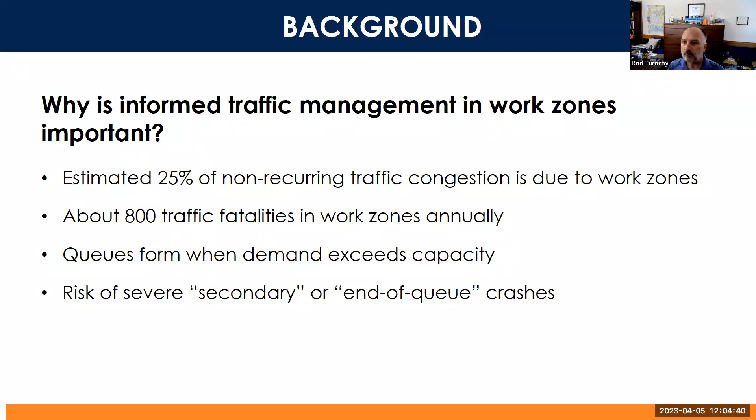The portion of the research work done at Auburn, I've entitled Capacity of Freeway Lane Closures, looking at breakdown probability and heavy truck impacts. I need to acknowledge a couple of graduate students, Nick Jean and Han Lo, who also worked on this research project. I've been interested in work zone traffic management pretty much as long as I can remember, going back almost 30 years ago to when I was an engineer trainee and then a traffic engineer with the Virginia DOT, where work zone safety was my area. So this is an area that's been of importance to me for a long time.

So the purpose and scope of the portion of the research project conducted at Auburn was, again, trying to support an informed approach to scheduling lane closures on freeways.

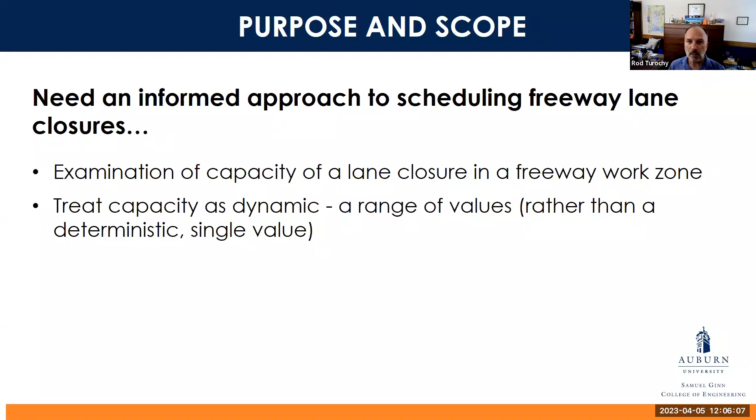We looked at the capacity of lane closures in a freeway work zone, and treated capacity as dynamic rather than a single static deterministic value. That's an important premise guiding the work, because while tools exist, for example in the Highway Capacity Manual, that allow estimation of the capacity of a work zone, it's still a single deterministic value rather than having some range or variance or spread that accounts for the actual randomness in traffic conditions. So in this research, we tried to account for that.

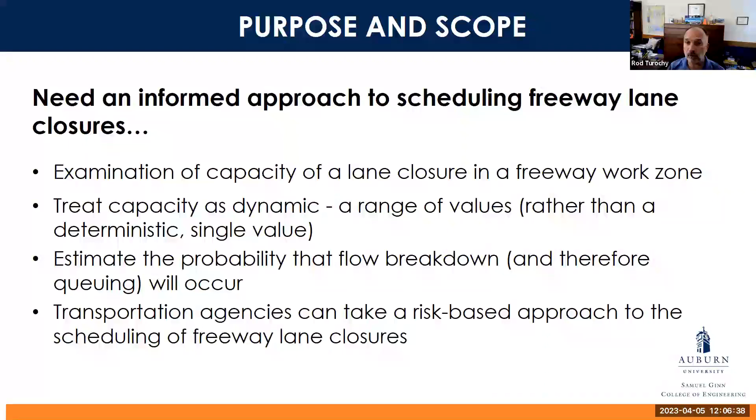We were interested in estimating the probability, or the percent chance, that a breakdown in traffic flow, and therefore a backup or queuing and all the mobility and safety impacts of that, will occur. This approach allows transportation agencies to take a risk-based approach to scheduling freeway lane closures. In other words, what's the tolerance of risk that a backup will occur at a lane closure? We'll get into that over the next few minutes.

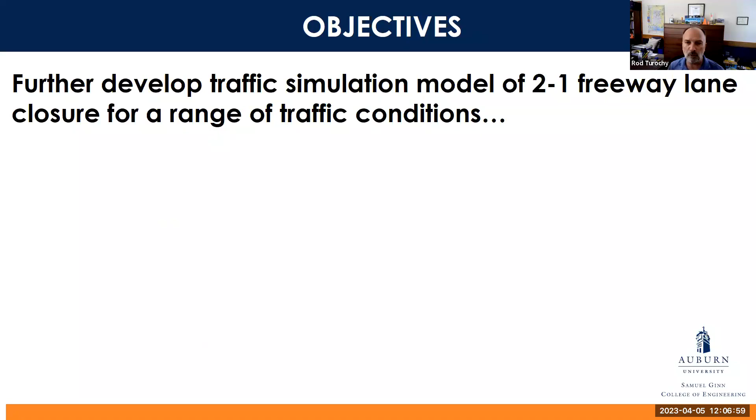So the objectives of the portion of the research done at Auburn were to further develop traffic simulation models for a classic 2-lane to 1-lane freeway lane closure on one side of a 4-lane freeway or interstate highway, across a range of traffic conditions.

It was built on the traffic simulation models in the package VISSIM that were developed and calibrated for a previous STRIDE research project entitled Project J, which this project expands on. We'll quickly go through the findings of that project and then get on to the new findings we have to report today.

If you would like more detail on that STRIDE Project J, just Google STRIDE Project J, and the project page will come up along with links to the final report and the recorded webinar.

In this research, we built upon a pilot approach, or test case, that was the conclusion of that previous STRIDE project, expanding the range of traffic conditions in terms of volumes, truck percentages, and so forth, addressing the previous work. We'll look into that over the next few minutes.

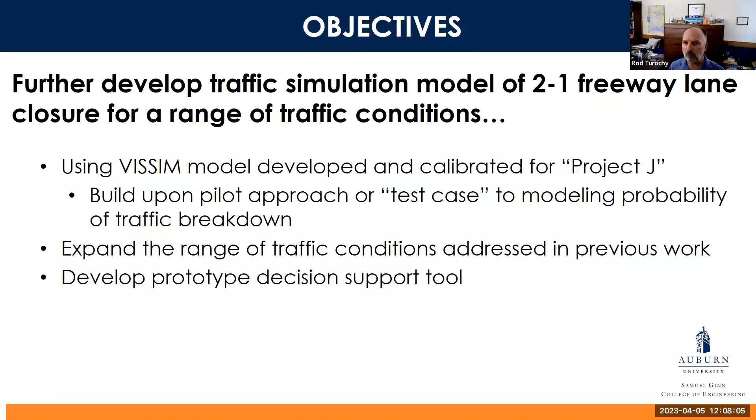And this culminated in the development of a prototype decision support tool that transportation agency decision makers can use to make a more informed decision as to when to allow a lane closure to occur.

Along the way, because we were looking at capacity in a live traffic stream with field data that had a fair amount of heavy trucks in it, we were also able to develop some passenger car equivalencies for those heavy trucks and compare those with what's in the Highway Capacity Manual.

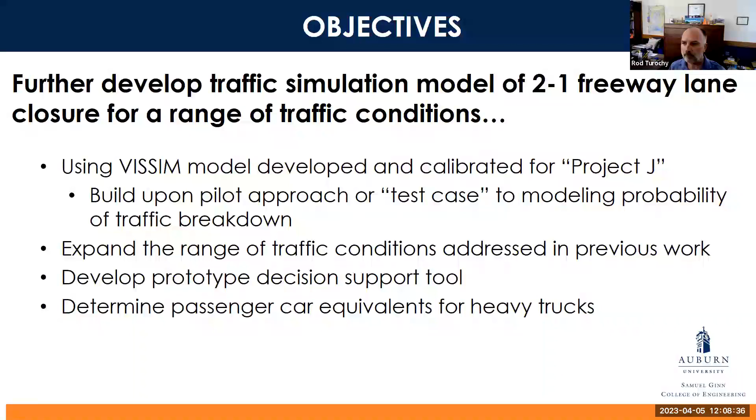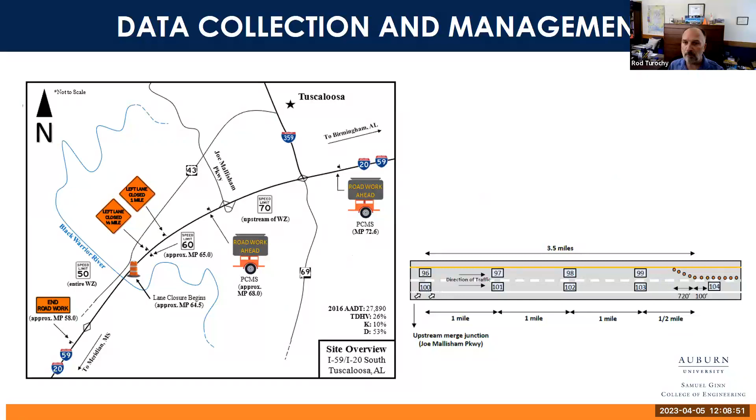So first, let's spend a moment taking a look at the site where we collected the field data. This is a section of I-59 and I-20 overlap just southwest of Tuscaloosa, Alabama, where the data were collected for that previous STRIDE project, where the models were developed and calibrated, and then expanded in the current work.

It was a classic 2-to-1 lane closure on a rural freeway, 4 lanes, 2 lanes in each direction, in level terrain. That's important to note, because the findings we'll get into in a few minutes carry that caveat with it, that it was for a rural freeway 2-to-1 lane closure in level terrain.

So for 2 weeks that work zone was in place, several days with a left lane closure, and then several days with a right lane closure at that same location.

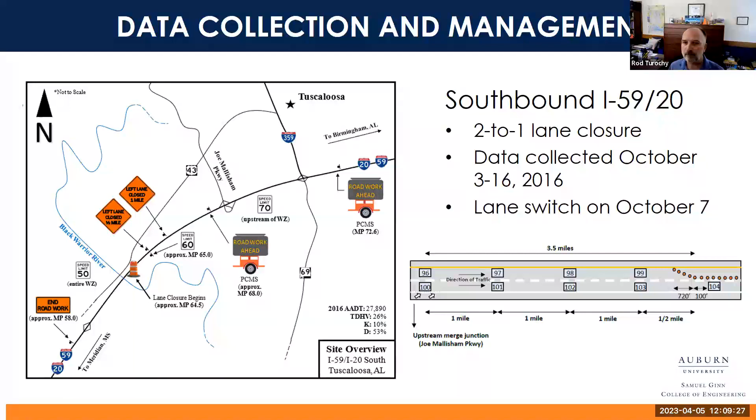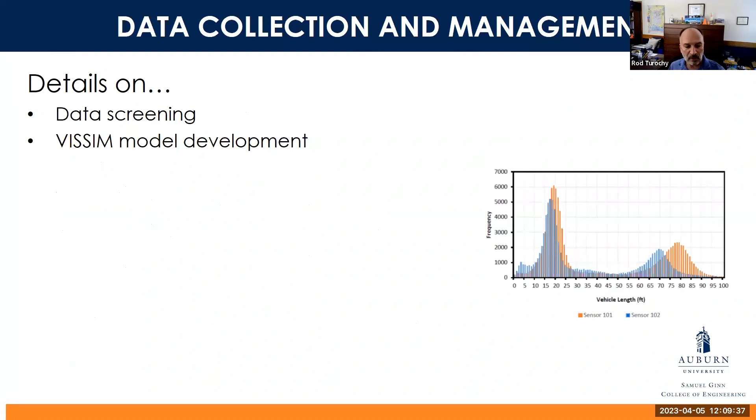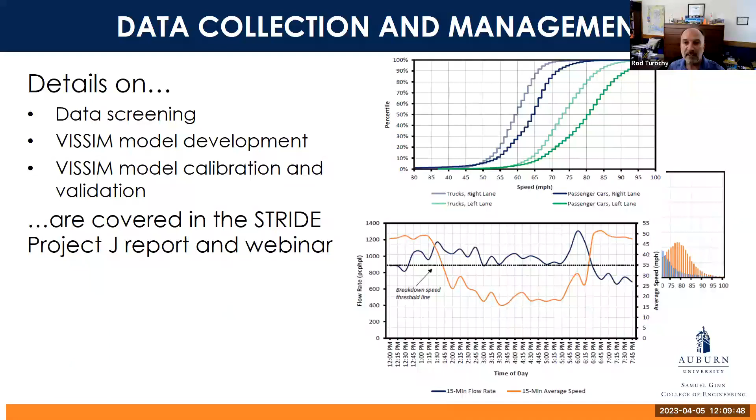Details on the screening or quality control of the field collected traffic data, the development of the VISSIM traffic simulation model, and the subsequent calibration and validation processes for that model can all be found in the STRIDE Project J report and webinar. So we'll just hit the highlights here.

One of the interesting things we find is we started looking at conditions where traffic demand was such that we were reaching capacity for that lane closure. We had to define at what point in traffic conditions we considered there to be a breakdown. A criterion had to be decided upon.

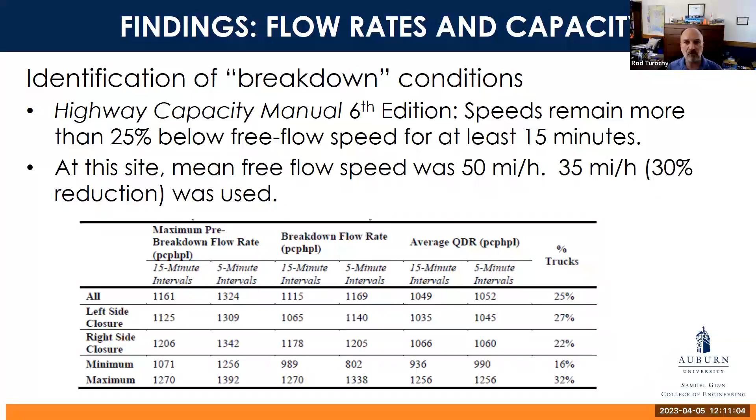We had the data in the field from this rural freeway lane closure and level terrain to come up with all these values, and those were the basis for the VISSIM model. We'll get more into that in a moment.

Some findings from that previous project, just to hit highlights for those in the audience who do traffic simulation modeling of work zones: we had to change several parameters from the default values that were in VISSIM.

For example, VISSIM uses 8 feet per second squared as the heavy truck acceleration, but that's more appropriate for trucks in Europe, which is where PTV Group, the makers of VISSIM, are based. So we had to calibrate that to 2 feet per second squared for the larger, heavier trucks we have in the US. We also needed to modify the default time gap, or time headway distribution, in VISSIM.

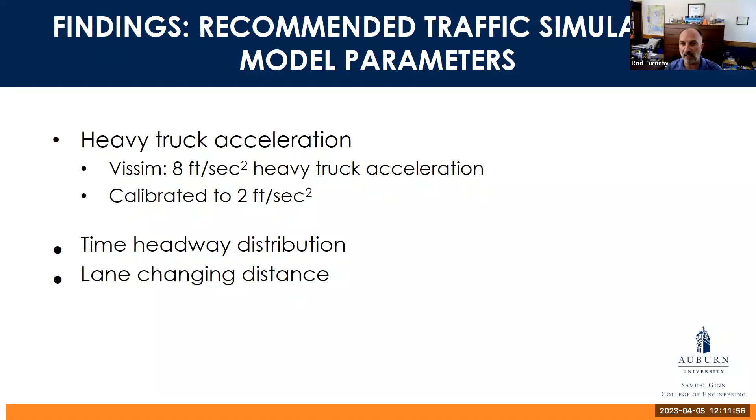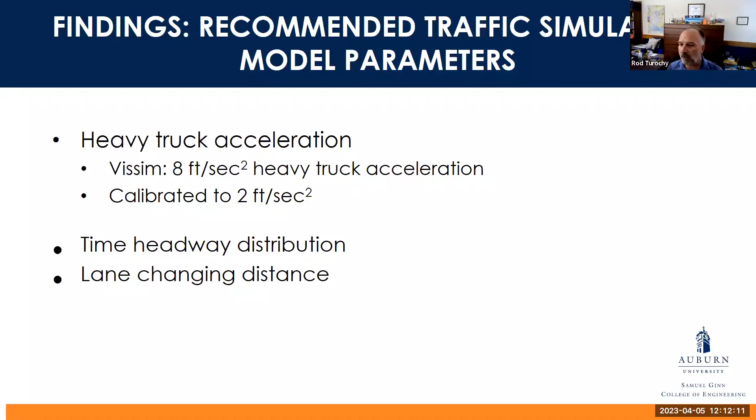We also modified the lane changing distance, and found that traffic at our site in the rural southeastern US merges into the lane that's about to be closed further in advance of the actual taper than the default values in VISSIM. Details on all of that work can be found on the STRIDE Project J webpage and resources.

Moving on to the work done as part of this current project, it's worth noting as background that the models for freeway lane closures took a major step forward in the 6th edition of the Highway Capacity Manual, released in 2016. They're more sophisticated and based on much deeper data sets than prior editions of the HCM, yet they're still deterministic.

For a given set of traffic and geometric conditions, the equations spit out a single value for capacity in that situation. Yet in recent years, some research has suggested that capacity is not actually a fixed value, but has a bit of a spread or range to it. There's some randomness we wanted to account for, so we viewed it as a stochastic process rather than a deterministic one.

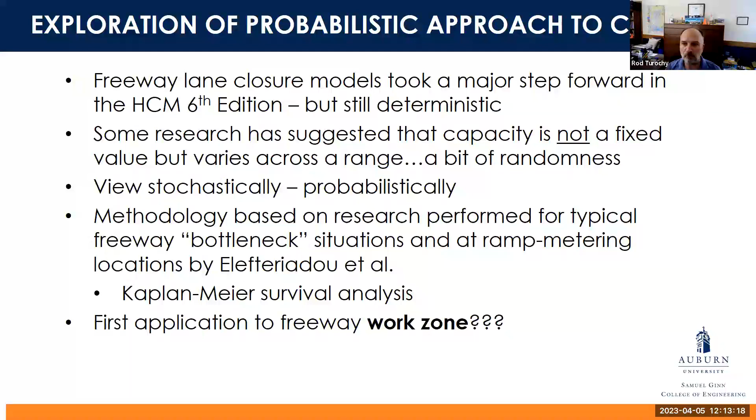The methodology we used in this research was based on work done several years ago by Dr. Elefteriadou at the University of Florida, looking at freeway bottleneck situations, particularly for ramp metering conditions, and we applied that to the work zone lane closure.

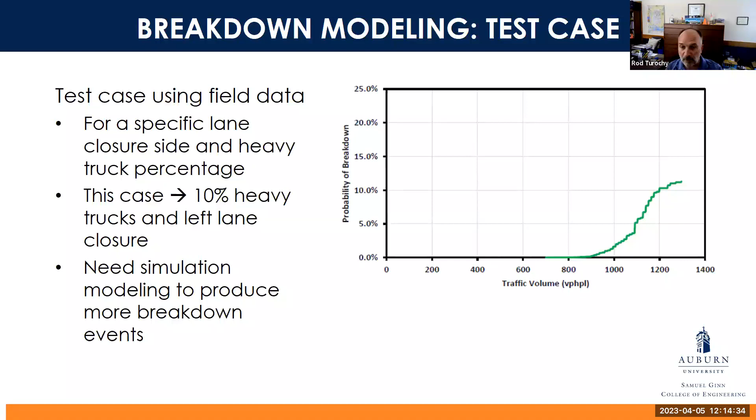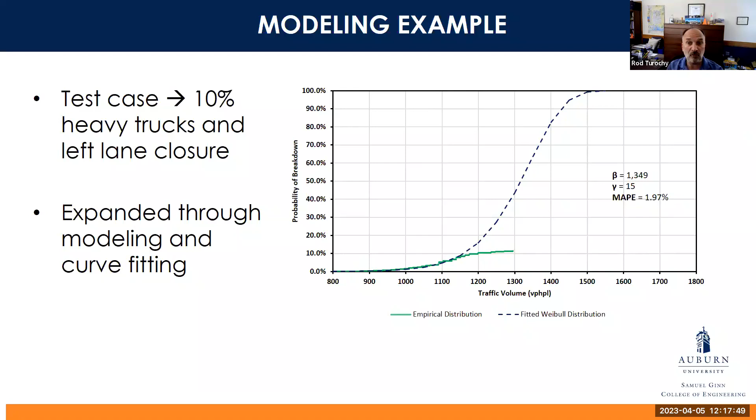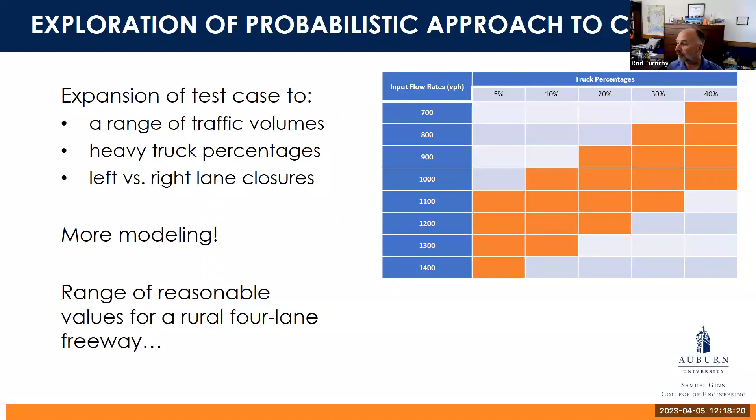Let's go back to this table. Now we're getting ready to flesh out, for all the cells in orange, the combinations of traffic volume in vehicles per hour and these intermediate points of truck percentages. We're getting ready to add the curves for all of those cells shown in orange, after simulation runs—I believe 10 runs per each scenario—to get a decent random number of seeds in the modeling. We can then look at those breakdown curves.

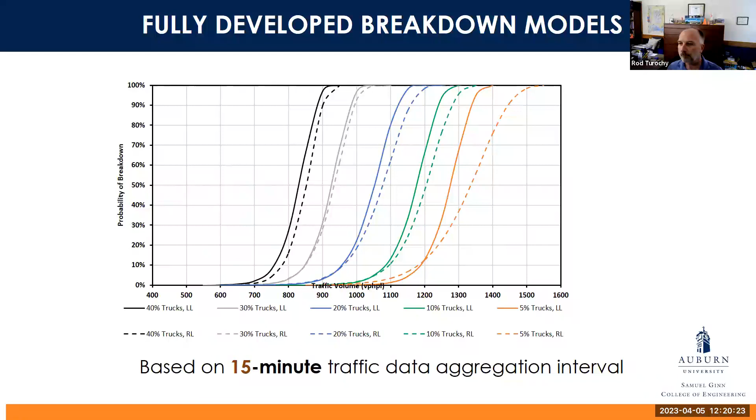We also, along the way, were able to calculate passenger car equivalents, specific to the conditions we had—again, a rural 4-lane freeway, 2-to-1 lane closure in level terrain in the southeastern US. We'll skip the math behind it, but the optimum passenger car equivalent value was about 2.49, which we'll round off to 2.5.

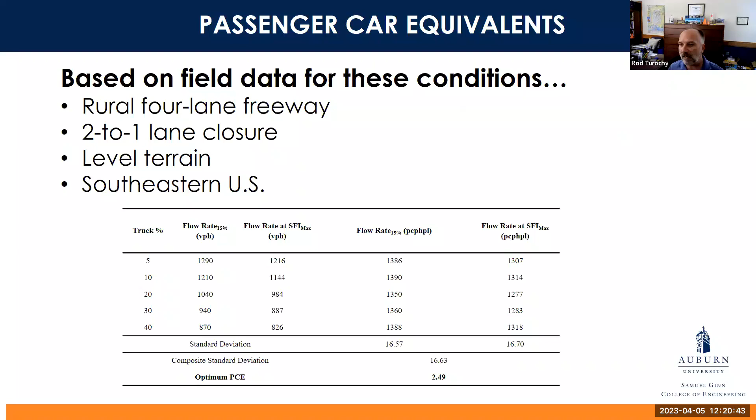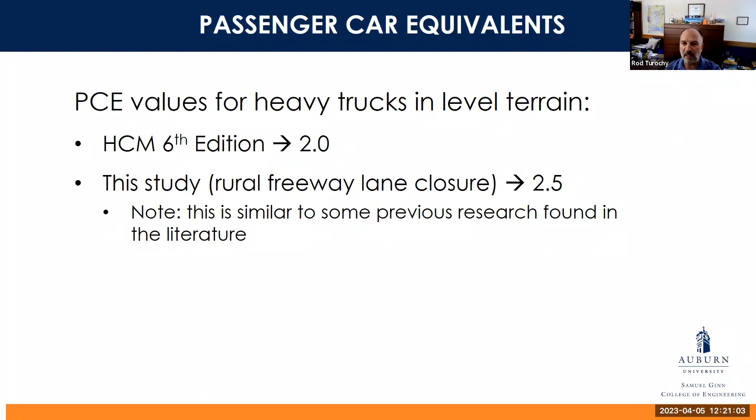That disagrees a little bit with what's in the Highway Capacity Manual 6th edition. For heavy trucks in level terrain, the recommended equivalency value is 2.0, but there's other research that's been done over the years, and a couple of studies found that for work zones we can expect that passenger car equivalency value to be a little larger.

So wrapping up the portion of the work conducted at Auburn, just summarizing, and then I'll turn it over to Virginia to describe the work that was conducted at UAB.

We modeled freeway lane closures stochastically rather than deterministically. This approach allows transportation agencies to take a risk-based approach to determining when to allow lane closures to occur—essentially more informed than perhaps an arbitrary time range of 9 p.m. to 5 a.m., for example. With some basic traffic data, this approach is a bit more robust.

So these prototype curves that we just looked at allow an agency to make those decisions based on traffic volume, percentage of traffic that's heavy trucks, and whether it's a left or right side lane closure.

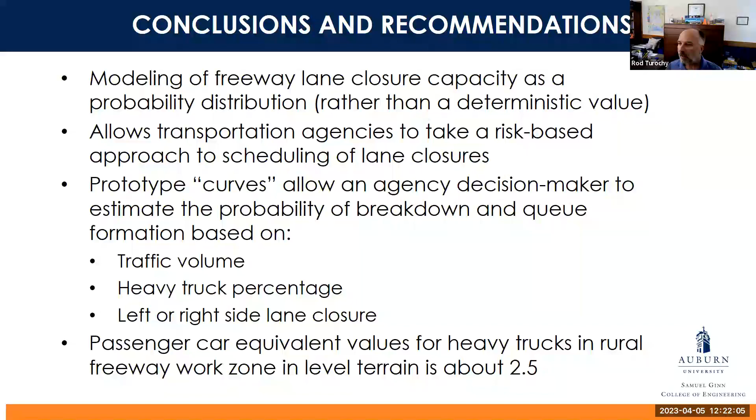We also did a little bit of work with passenger car equivalents and found that for rural freeway in level terrain, in a work zone situation, those values are higher than what is indicated for use in the Highway Capacity Manual. So that wraps up the portion of the research conducted at Auburn.

So Virginia, go ahead and fill us in on the work that was done at UAB.

Thank you so much, Rod. So let me just take a second here. Rod...

Rod covered a lot of points in his introduction about the importance of studying work zones. At UAB, we did a parallel study to look at the impacts on traffic operations from considering various work zone setups, various traffic demand, and various traffic composition options. This work was done primarily by my student, Tasif Chai, who I would like to acknowledge, along with myself.

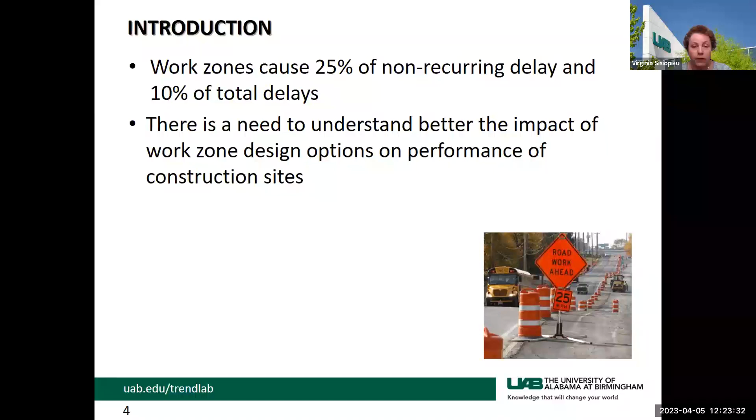It is important because traffic work zones are a common phenomenon. The possibility of a driver confronting an active work zone is 1 out of every 100 miles driven on the highway. Since we have to live with them, I think it is important to understand how we can set them up to minimize the impacts on traffic operations and the inconvenience that motorists experience.

Our study at UAB had some similarities but also differences with the one presented by Rod. We tried to investigate the operational impacts of work zones related to geometrics—referring to lane position, length of the work zone, and so on—to traffic control setup, especially focusing on early and late merge, and then changes in traffic demand and traffic composition.

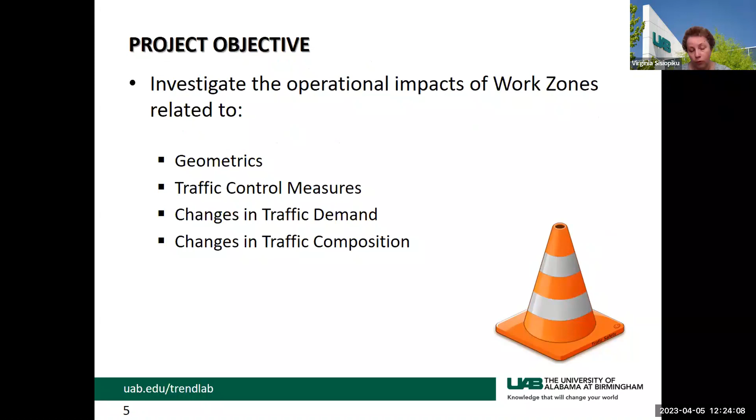So we started this as a classic study where we engaged in a literature review that focused on available temporary traffic control strategies, earlier studies that looked at work zone performance assessment, and also availability of simulation platforms. We used the input from the literature review to guide the formulation of our study objectives and also the experimental design.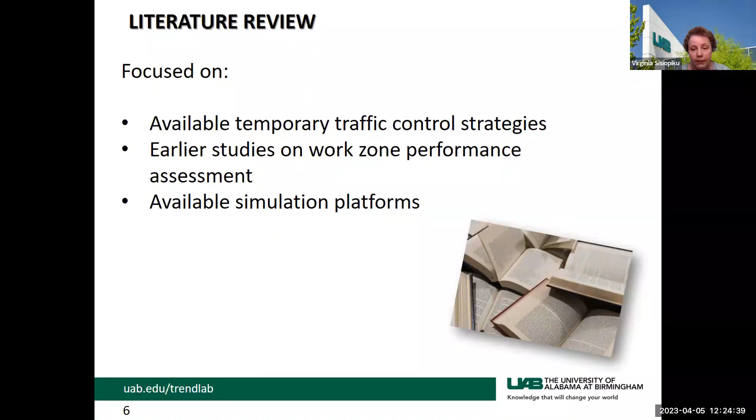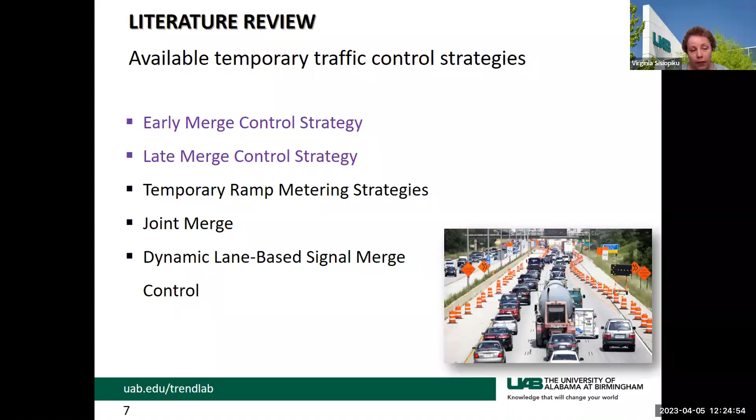When we looked at the available temporary traffic control strategies, we identified 5 strategies, which are listed here on the slide. Of those, the most commonly used are the early merge control strategy and the late merge control. These pictures that you see here depict the details.

For the early merge control strategy, we set up signs that advise drivers that there is a lane closure, so they have to merge into the open lanes. On the late merge control, we let the drivers get close to the point where the lane drop is, and then they try to merge into the open lane, as you see at the bottom sketch in the figure.

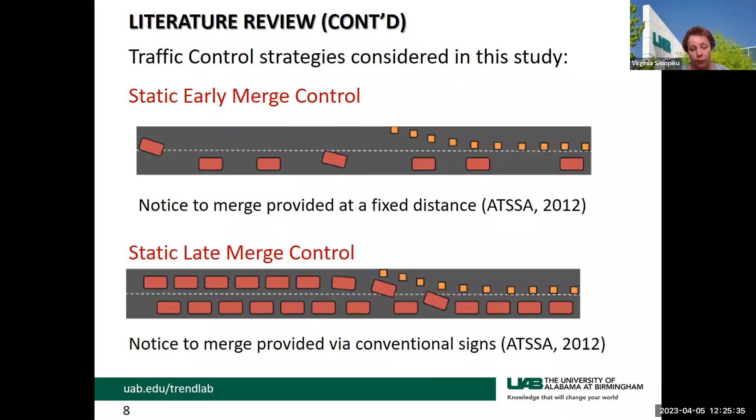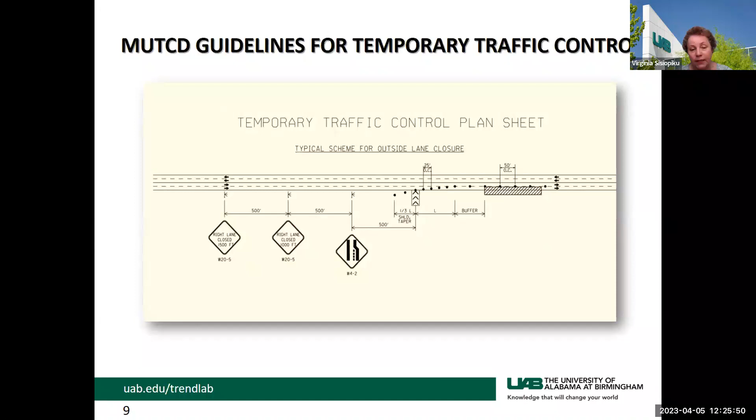All the details on how this needs to be set up are provided by the MUTCD. So we reviewed those so that we have a realistic representation in our scenarios.

With respect to previous studies, we identified several studies and summarized those in our final report. Several of these studies also looked at early and late merge, as it was the case in our work. They used microsimulation modeling, and some had field results as well that were included.

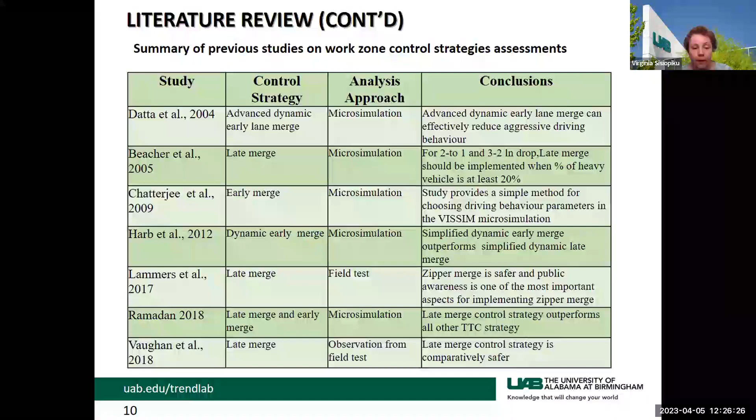We also reviewed available simulation platforms, and we identified 5 that we looked into in great detail. Similar to Rod in their part of the study, we selected VISSIM for our

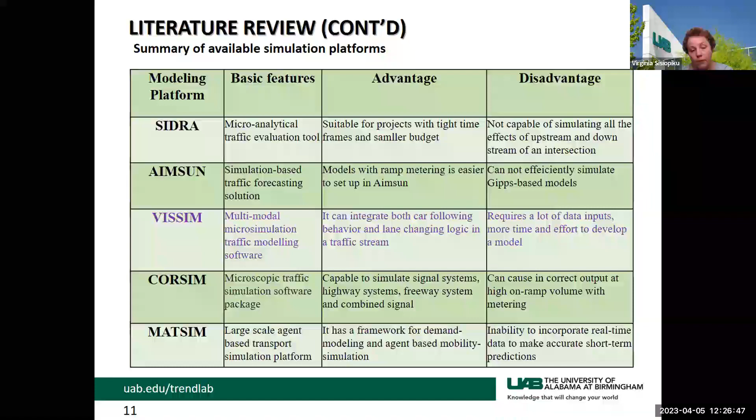experiments later on. All in all, the literature review confirmed that there is a variety of work zone designs and control options, and there are some studies that have tried to quantify such impacts. However, there is still work to be done in order to better understand the impacts of different types of work zone placement, length, traffic control, and traffic composition.

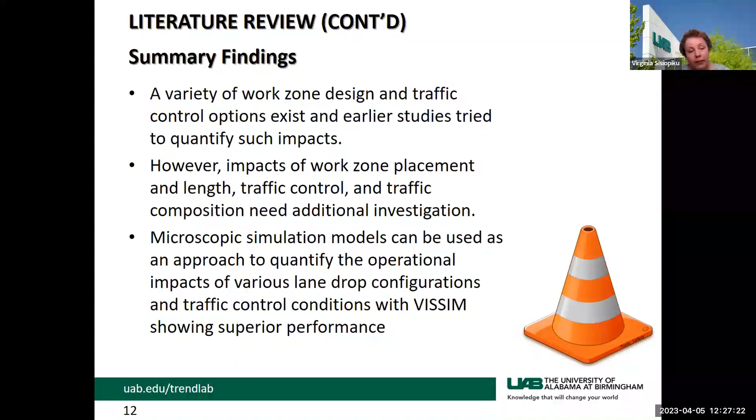With that in mind, we decided to use Birmingham, Alabama as a case study, and in particular select a portion of I-65 as our test bed. That is a 10-mile-long section of I-65 running through the city of Birmingham.

We placed the work zone around the middle of the section on the northbound, and that was on purpose so that we can also have the opportunity to see the impacts as far as over space—to see the extent of congestion due to the presence of the work zone upstream from that location.

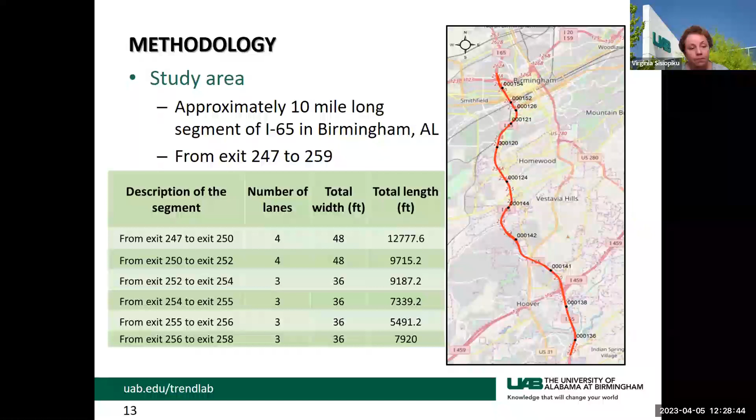As far as the experimental design is concerned, we decided to vary the work zone length from 1,000 to 3,000 feet. We considered 2 traffic control strategies, the early merge and the late merge.

We had a 3-2 configuration where, from the 3 lanes, we dropped to 2 lanes. That drop could happen either on the left lane or on the rightmost lane, and we had some scenarios that looked at what happens if we drop the middle lane.

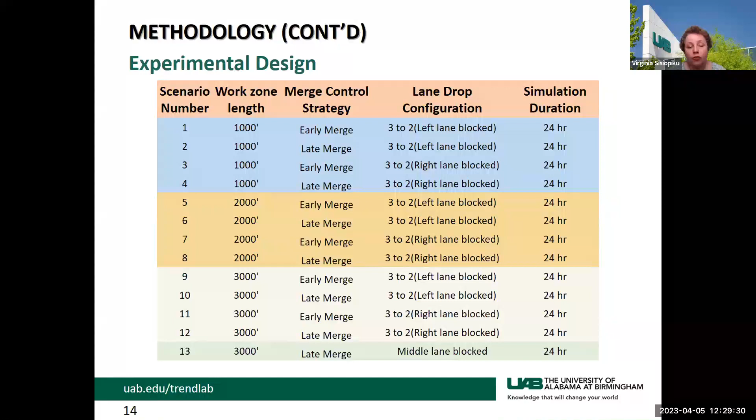We had, of course, the base model as well as work zone models. And we developed certain scenarios to study the effect of heavy vehicle increase from 10%, that was the baseline condition, to 15, 20, and 25%.

We also tested the impact of volume increase on traffic operations. So we wanted to see what happens if we increase our volumes by 10%, 20%, 30%.

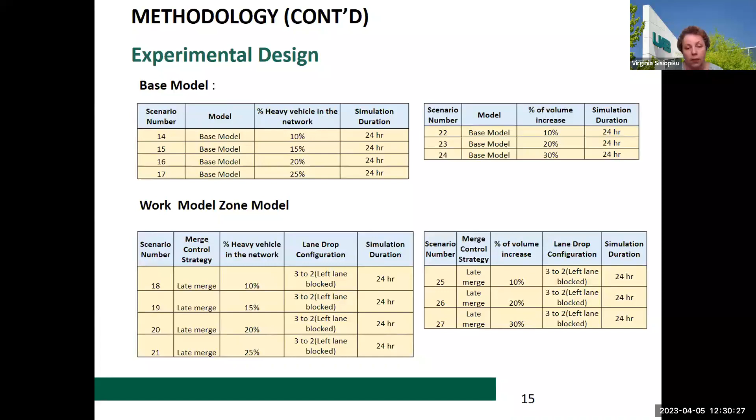All in all, we had a total of 27 scenarios: 7 were for the baseline conditions and 20 work zone conditions that we ran. And we ran 3 iterations for each scenario, resulting in 81 runs for the entire analysis.

As I briefly mentioned before, we chose the VISSIM platform for our simulation. This is a very well-known and well-tested model, so we have confidence in using the model, same as our colleagues at Auburn.

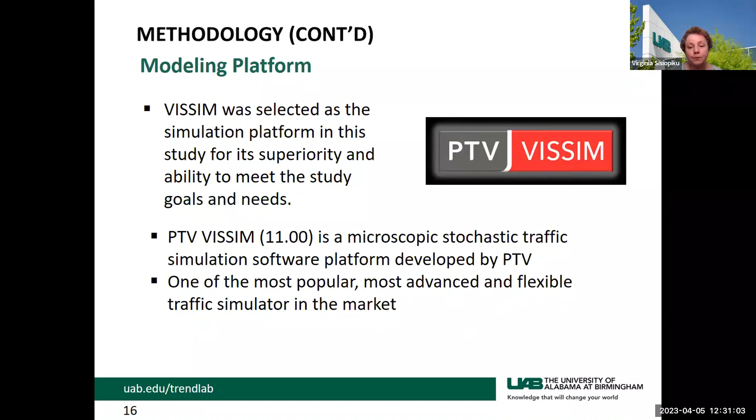But of course, we had to tweak the model because it doesn't have a specific module that simulates work zones. We got traffic volume data from ALDOT, and we chose a specific weekday.

However, ALDOT does not continuously collect data for all ramps, obviously, and the main line. So we had to supplement some of this data from another day or two, and then we had to kind of rebalance the traffic.

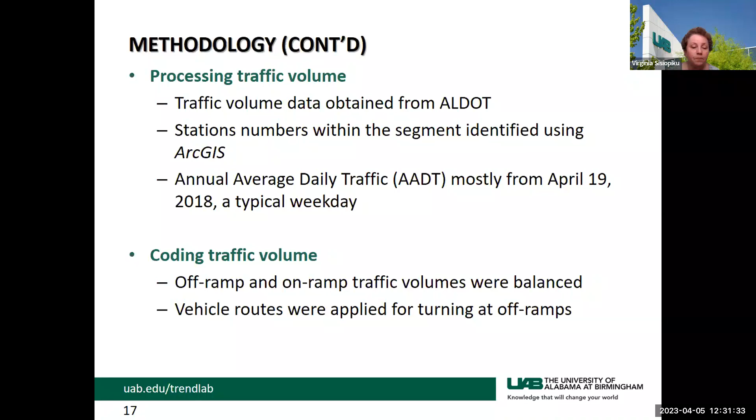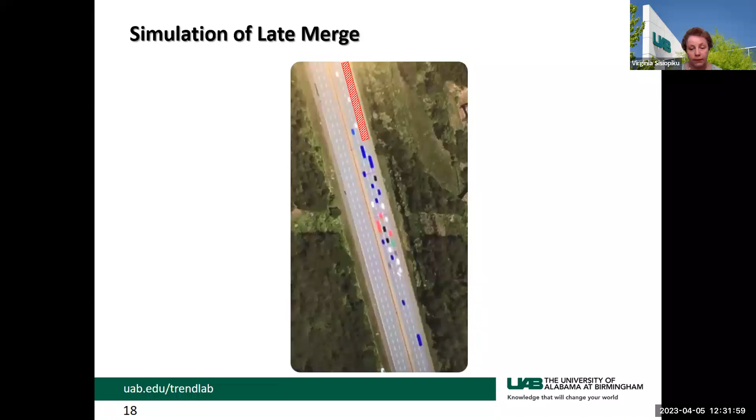One important part of modeling with simulation models is to perform calibration and validation of the model. So we did that for our baseline scenario, where we gathered some data from the National Performance Management Research data set, a federally available set that was made available to us through our partners at the Regional Planning Commission.

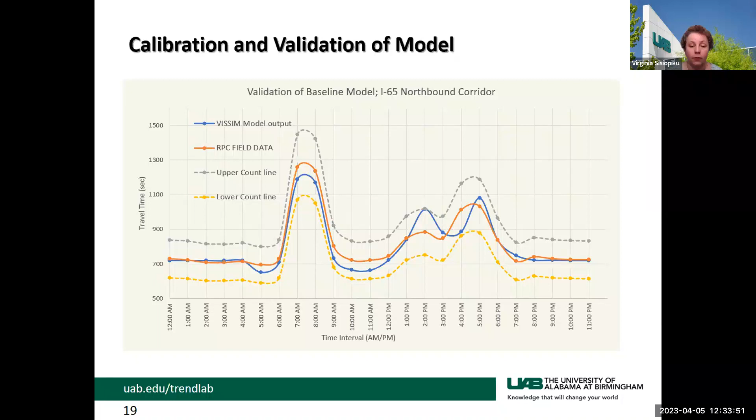Typically, when these data are within plus or minus 15%, then the validation of the model is successful. Here, the yellow and gray lines show those 15% limits, and we can see that the baseline VISSIM model of the network was successfully validated.

That gave us confidence in the results. So speaking of the results, first we wanted to know if the length of the lane closure has an effect on operations. Here we consider the late merge and the left lane closure, and we can see that these results are pretty close. As we varied the length of the closure from 1,000 to 2,000 to 3,000 feet, we don't see much of a difference in the delay, which leads us to the conclusion that the work zone length effect is insignificant.

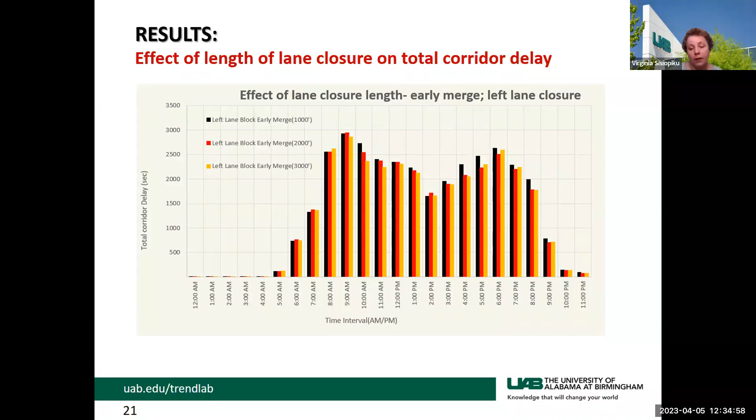This is what we observed also when we looked at early merge options. So again, we can say that the length of the work zone effect is negligible.

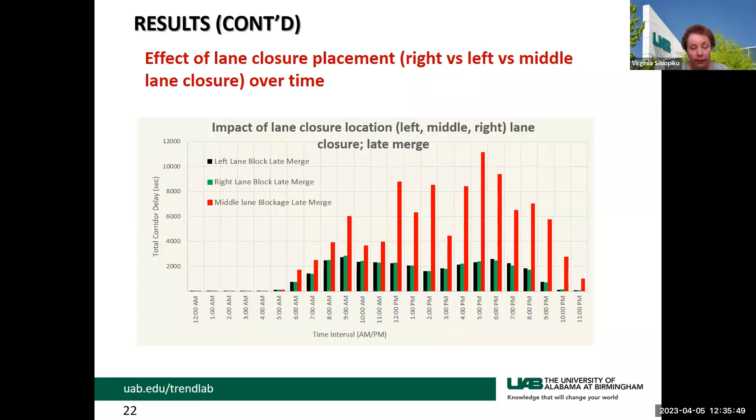Then we considered the differences in impacts on traffic operations from three different lane closures: one on the far left, one in the middle, and one on the right lane. Clearly from this graph, you can see the red bars popping up, showing that the middle lane blockage produces much higher delays than the other two setups. So based on what we observe, we would definitely recommend that this middle lane blockage be avoided when practical, which is often the case.

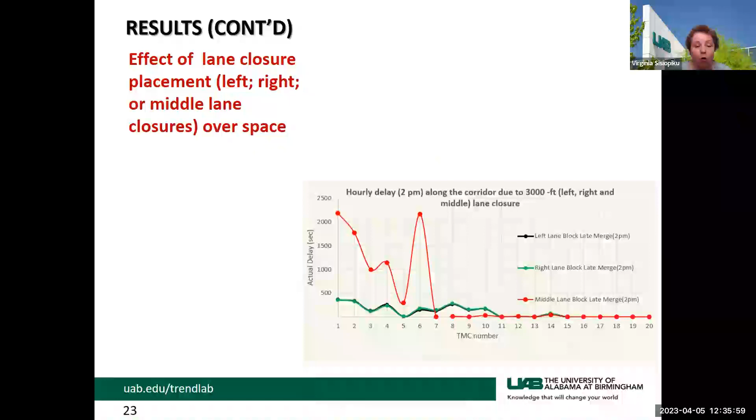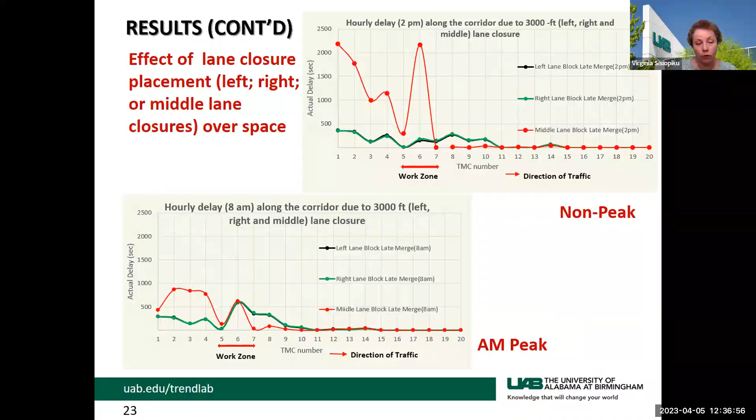Next, we observe the effect of lane closure placement over space. It is similar findings, but here we consider the upstream effects as well. Once again, the red line represents the middle lane block, and the green and black refer to the right or left lane blockage. You see where the work zone is shown on the screen, and if you look to the left you will see the upstream impacts. Once again it is clear, especially in non-peak conditions, that delays are higher with a middle lane closure, but between left and right we don't see any major differences.

The next experiment we ran was to increase the traffic volume. On your screen you will see the baseline model in blue, then in green a 10% increase in volume, and in yellow and red the 20% and 30% increases. What we can see is that the corridor can easily absorb a 10% increase in traffic volume. However, when we increase further to 20% or 30%, the performance is expected to deteriorate drastically.

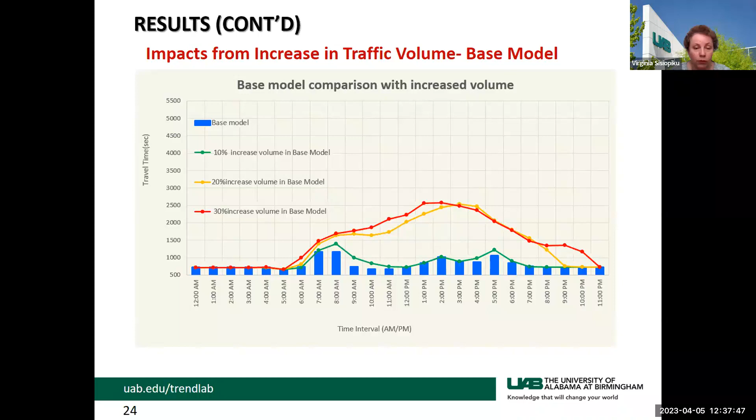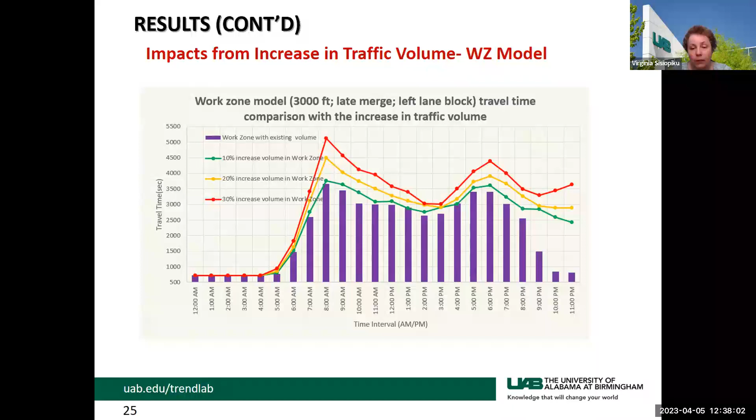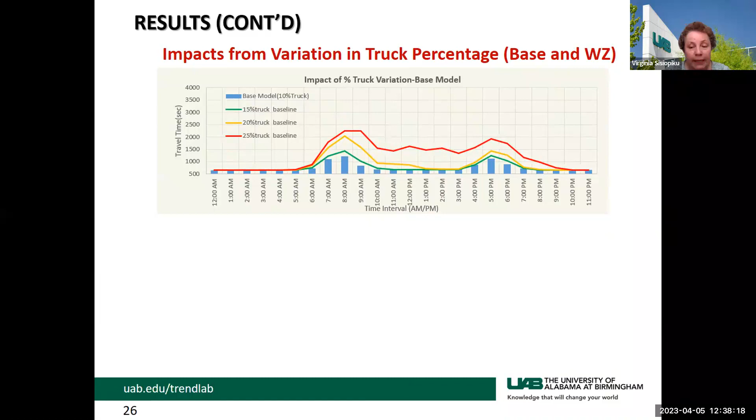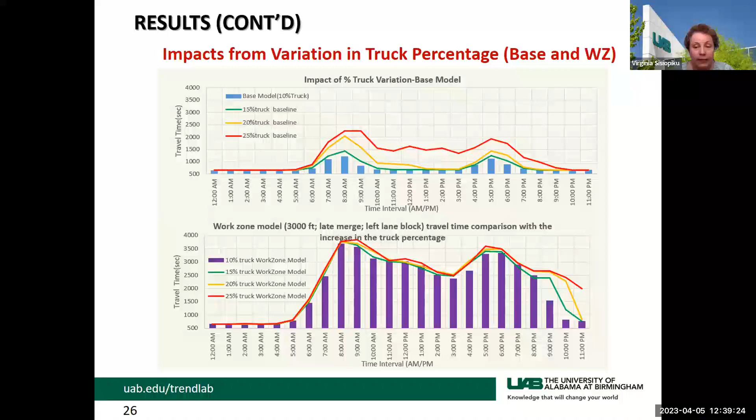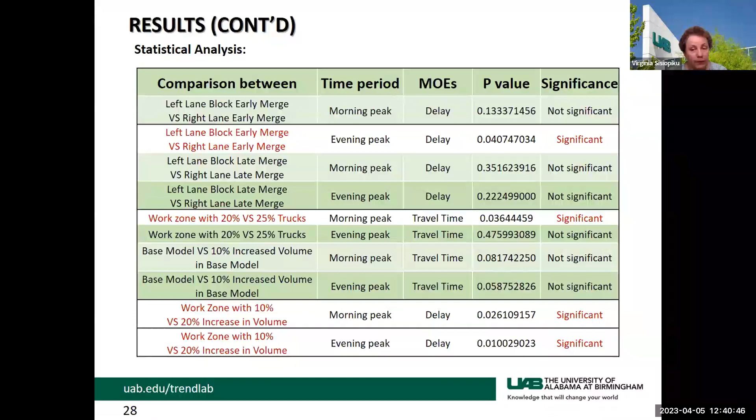The results that we found from this analysis shed some extra light on the types of conditions and options that we can use in order to minimize the adverse impacts of work zones on congestion.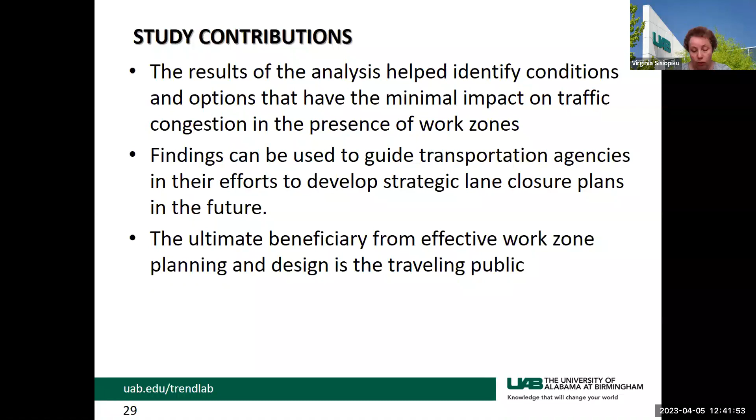We hope that these findings can be helpful to transportation agencies that are trying to develop strategies for lane closures that will have the minimal impacts on traffic operations. But we think that the ultimate beneficiary of work related to work zones is the traveling public, and better set up work zones will definitely have a positive impact on user satisfaction as well as traffic safety.

Before I wrap up, I would like to highlight a few of our study assumptions and limitations. As I mentioned before, some of the volumes that we used in the modeling were not gathered at the exact same day, because of the lack of availability of data, but we addressed this through balancing those volumes.

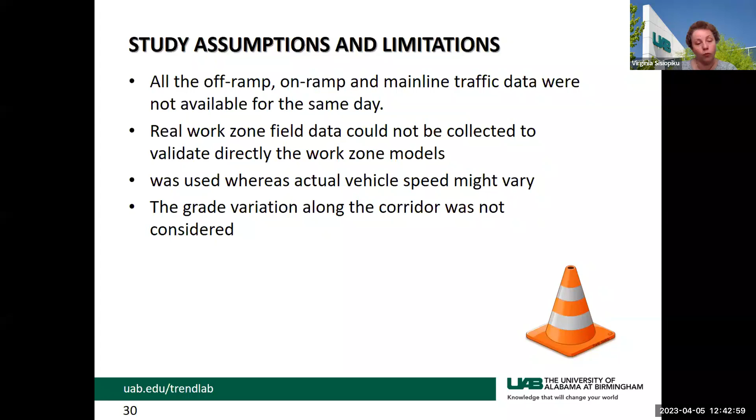Also, the variation along the corridor was not explicitly considered. So in all, we would recommend that future studies also look at weekend operations, because our data were from typical weekdays, and also look at the 3-to-1 lane closures, so closing 2 lanes instead of 1.

We have done some preliminary work on that on Project J that Rod also mentioned, but I think that there is still work to be done and things to be learned by looking at different lane closure configurations.

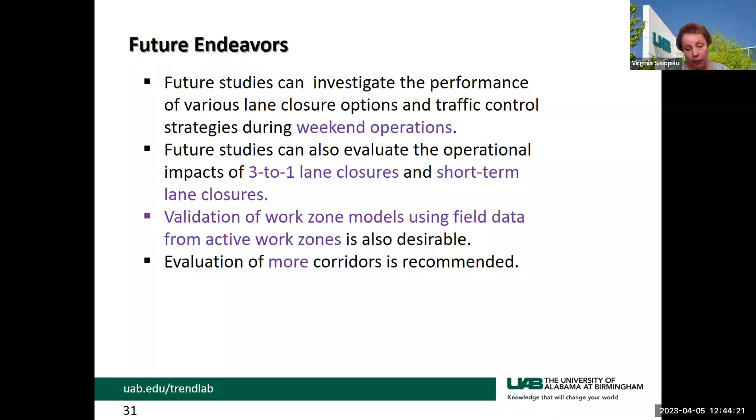This was a case study for that particular corridor along I-65, but our group would recommend that additional corridors are considered so that we can have a better understanding of how these impacts would register as we look at more corridors and try to generalize these findings for the benefit of other locations.